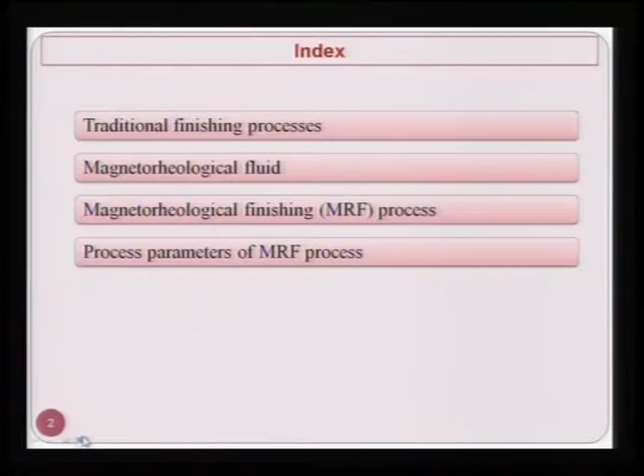The contents of this particular talk are as follows: traditional finishing processes, magnetorheological fluid, magnetorheological finishing process, process parameters of MRF process, and applications of MRF process.

Traditional finishing processes, we have already seen at some other places in some other course. There are three well known traditional or conventional finishing processes: grinding, honing and lapping.

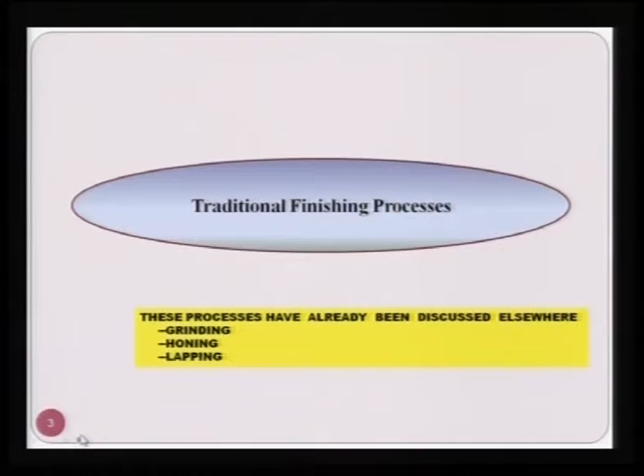All three processes have their constraints. Especially grinding has the limitation that it can only be applied for flat surfaces or cylindrical surfaces. Another problem with grinding is that a large amount of heat is generated, causing thermal stresses in the ground component. Thermal cracks are created, and this process cannot be used for complex shaped geometry.

Honing gives a good surface finish and not a very large amount of heat is generated, but it is limited to cylindrical, external and internal surfaces. Some other shapes can be machined, but not a very large variety of shapes.

Same is true as long as limitations are concerned with lapping. Lapping is a very good, commonly used process, especially good for flat surfaces. It can give good surface roughness value, very low, but cannot be applied for complex shaped components. Also, to some extent in honing and lapping, some very fine thermal errors or thermal cracks may be developed, which we will not be discussing here.

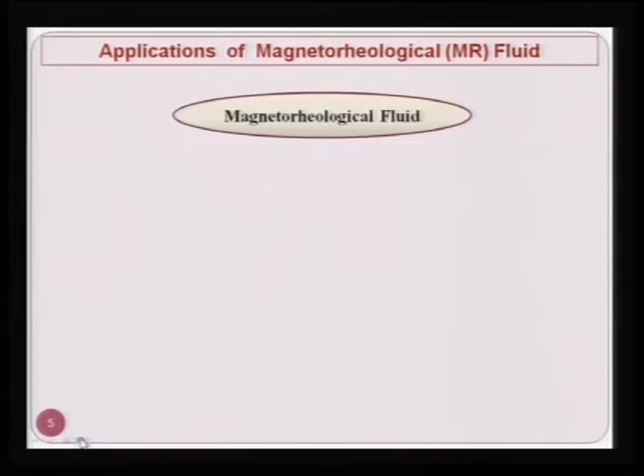Applications of magnetorheological fluid: magnetorheological fluid without having the abrasive particles is also used for many other applications rather than only magnetorheological polishing. When we are using this fluid for polishing purposes, we add abrasive particles which act as the finishing tool, as we will see here.

The magnetorheological fluid has applications in clutches, brakes, dampers, etc. The important point to note here is that the fluid does not contain any abrasive particles in these cases. On the other hand, this magnetorheological fluid is used for finishing of optical lenses, glass, ceramics, plastics and some non-magnetic metals.

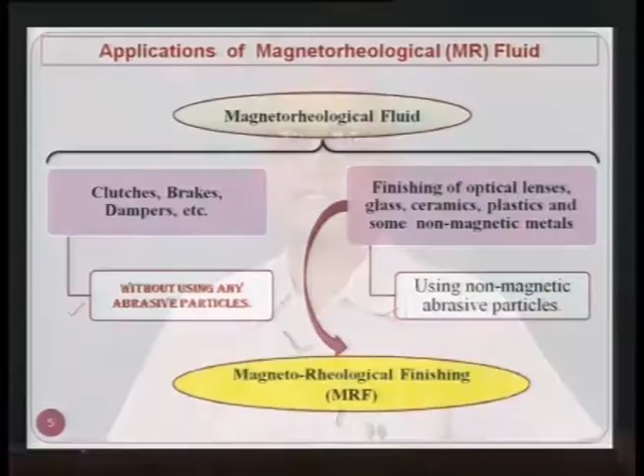The important point here to note is that this fluid is using non-magnetic abrasive particles. These particles include alumina Al2O3, silicon carbide SiC, and it can be diamond particles also.

In this particular talk we are going to discuss the application of magnetorheological fluid in the field of finishing. This process, when using magnetorheological fluid along with abrasive particles, we call magnetorheological polishing fluid or MR polishing fluid. In this talk I am going to discuss only the magnetorheological finishing process, which uses MR polishing fluid as the tool.

The constituents of MR fluid are as follows: magnetic particles, abrasive particles, carrier fluid and stabilizers.

As you can see in this particular table, the magnetic particles may be carbonyl iron powder, also known as carbonyl iron particles, electrolytic iron powder, and iron cobalt alloy, as shown in the first column. Then there are various kinds of abrasive particles added to this fluid: cerium oxide, diamond powder, aluminum oxide, silicon carbide, boron carbide, etc.

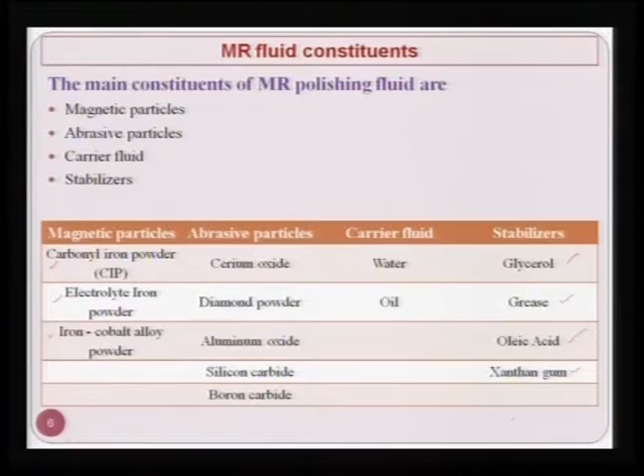Now, when you mix magnetic particles and abrasive particles in the carrier fluid, these particles will settle down at the bottom because they have higher density compared to the carrier fluid. So we need what is known as a stabilizer, and there are various kinds of stabilizers used in magnetorheological polishing fluid. It may be glycerol, grease, oleic acid or xanthan gum, one of these used depending upon the requirement.

Essential features of MR fluid for magnetorheological finishing process: optimum concentration of magnetic particles and abrasive particles is very important. If the percentage of these two constituents is very high, the efficiency of the finishing process is going to go down.

High yield stress under magnetic field: here we are applying the magnetic field and the fluid is always subjected to it. So whatever are the properties of MR polishing fluid without the application of magnetic field and with the application of magnetic field are going to be very different from each other.

Low off state viscosity means the viscosity of the fluid without the application of the magnetic field. Less agglomeration and good redispersibility should be there. The particles should not get agglomerated, otherwise they are going to affect the performance and quality of finishing. And once the magnetic field is no more, the particles should get dispersed quickly.

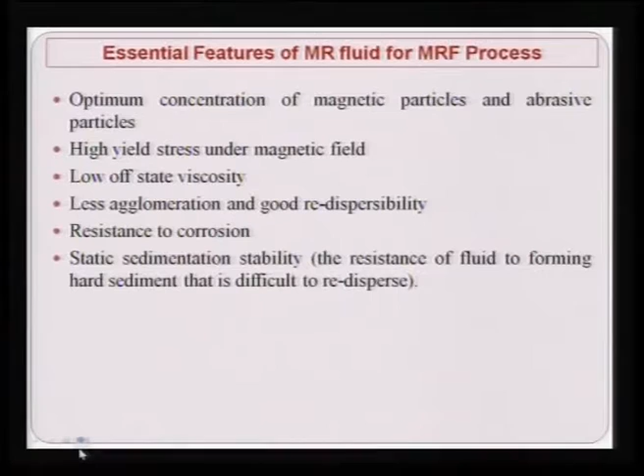And resistance to corrosion, static sedimentation stability, that is the resistance of fluid to forming hard sediment that is difficult to redisperse. That is what I mentioned earlier in case of point 4, that they should be static sediment stable. That means sedimentation should not take place, otherwise the properties of the fluid are going to change and that will not give the proper finishing.

High polishing efficiency, that is high removal rate without surface damage. Apart from this high material removal rate, we as manufacturing engineers are always concerned with the high finishing rate, because in finishing processes, finishing rate is more important than material removal rate. The objective is to achieve the desired surface finish without any defect in the lowest possible time, not to remove a large amount of material, rather to achieve the desired surface finish in the minimum possible finishing time.

Magnetic particles. The main functions of magnetic particles in the fluid are to form dense chain structure under magnetic field and to hold abrasive particles during the finishing process. This is very important. Once the abrasive particles are held by the magnetic particle chains, this acts something like a very soft grinding wheel, in which the bonding material holds the abrasive particles, and finishing is done. But once the fluid is out of the magnetic field zone, it will shatter.

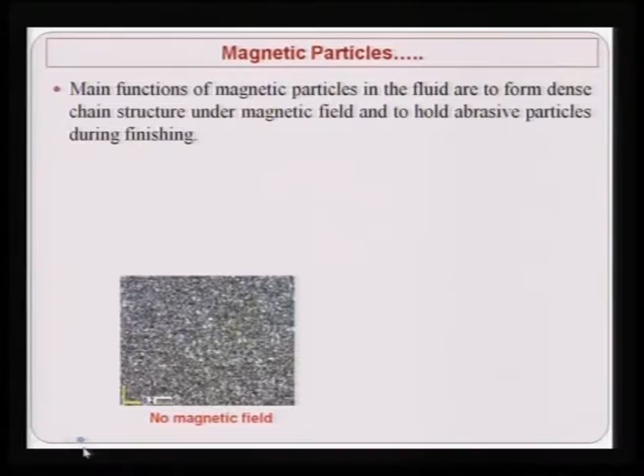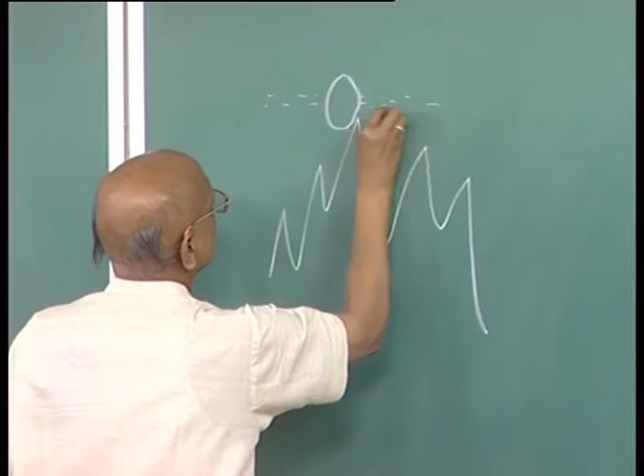I will just show you here something like this - this is the abrasive particle which is being held by the fluid chain. There is the chain of iron particles, and this chain is being pushed in this particular direction due to the rotation of the wheel. Then this peak will get removed like this, and the Ra value, RMS value will keep decreasing.

Without magnetic field, magnetic particles are dispersed randomly in the MR fluid as shown in figure 1a, and under the influence of magnetic field, magnetic particles are aligned along the magnetic flux lines - here is the north pole, here is the south pole. This is the direction in which the chains are being formed, as you can clearly see, and in between the chains, some abrasive particles are being held within the chains.

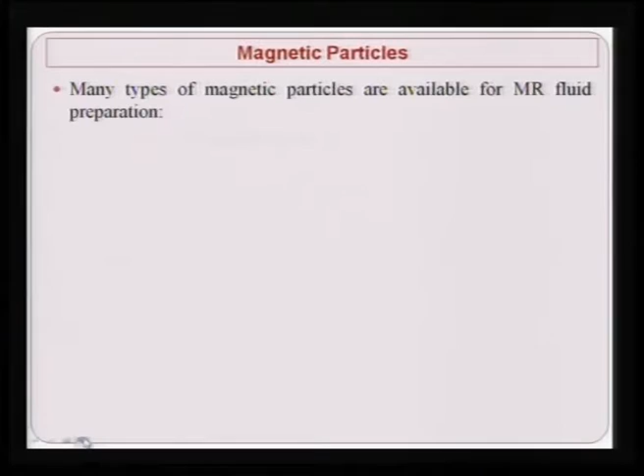Many types of magnetic particles are available for MR fluid preparation. As I mentioned earlier, you can use carbonyl iron particles, although carbonyl iron particles are very expensive, electrolyte iron powder, iron cobalt alloy powder, etc.

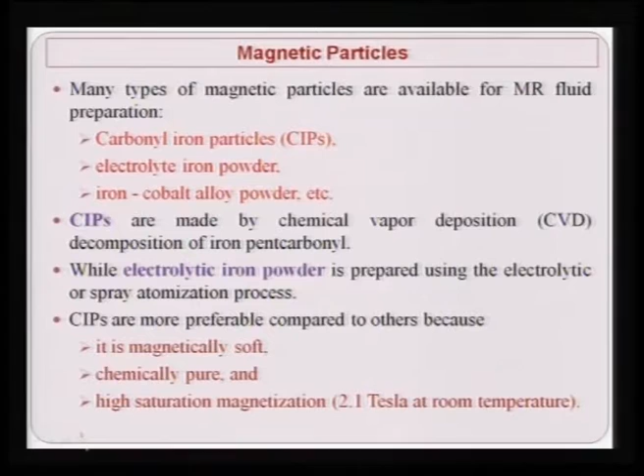CIPs are made by chemical vapor deposition, decomposition of iron penta-carbonyl, while electrolytic iron powder is prepared using the electrolytic or spray atomization process. CIPs are more preferable compared to others because they are magnetically soft, chemically pure, and have high saturation magnetization, that is 2.1 Tesla at room temperature, which is really a very high value of saturation compared to the saturation value for any other iron or magnetic particle.

Abrasive particles are non-magnetic materials in MR fluid responsible for material removal. As I mentioned earlier, these are the abrasive particles which really remove material from the workpiece, while chains of iron or carbonyl iron particles just act as the bonding material in the grinding wheel, holding these abrasive particles. When there is relative motion between the abrasive particle and the workpiece surface, material is removed in the form of microchips or nanochips depending upon the finishing conditions.

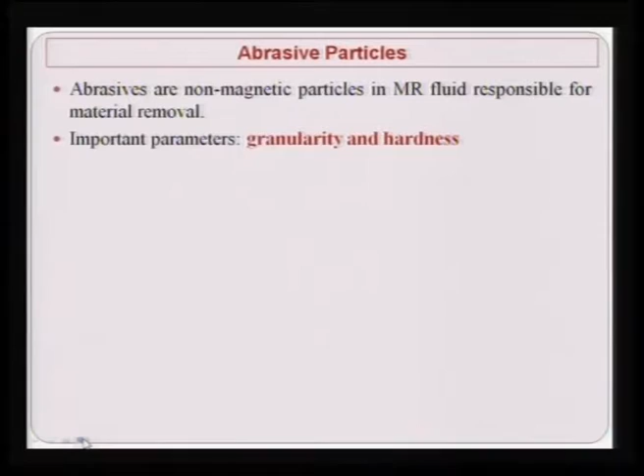Important parameters are granularity and hardness of these abrasive particles, which make the difference as far as finishing rate is concerned. Commonly used abrasive particles are alumina Al2O3, silicon carbide SiC, cerium oxide CeO2, and diamond powder. Other abrasive particles can also be used depending upon their availability, cost, and the requirement of the process.

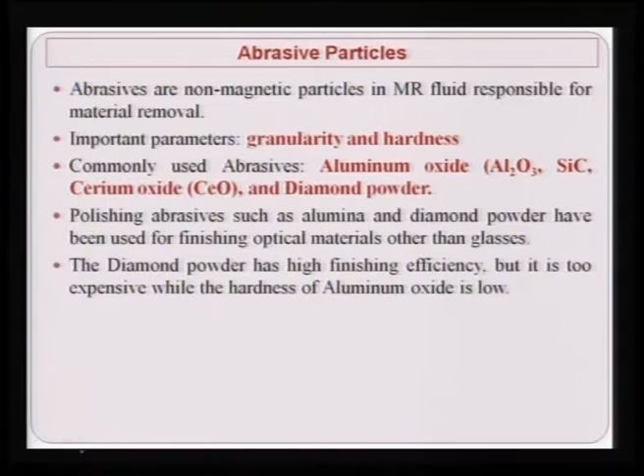Polishing abrasives such as alumina and diamond powder have been used for finishing optical materials other than glasses. Diamond powder has high finishing efficiency but it is too expensive, while the hardness of aluminum oxide is low. So diamond particles can be used, but they are quite expensive. So one has to consider the application, then only diamond should be used as the abrasive particle for finishing purposes.

However, the most commonly used polishing abrasive and carrier liquid combination for magnetic field assisted finishing of all optical glasses, including many crystals, is cerium oxide and water respectively.

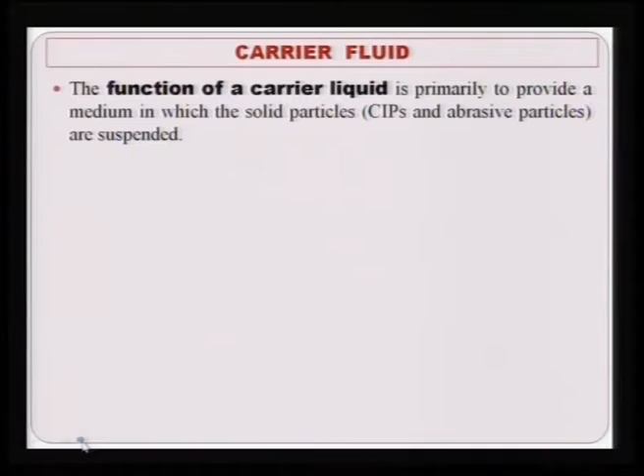The function of the carrier fluid liquid is primarily to provide a medium in which the solid particles like carbonyl iron particles and abrasive particles are suspended. The off-state viscosity of MR fluid should be as low as possible, so that it can easily reach difficult to reach areas, because wherever this fluid reaches and wherever there is relative motion between the abrasive particle and the workpiece surface, finishing will take place only in those areas. If the fluid is not able to reach those difficult to reach areas, then no finishing is going to take place, and you will not get the appropriate finished area as you want.

Important properties of carrier fluid are: the carrier liquid should be non-corrosive with magnetic particles, that is the carbonyl iron particles or iron particles, abrasive particles like alumina, silicon carbide, diamond, etc., as well as the components used in the device, that is the machine or MRF machine components material.

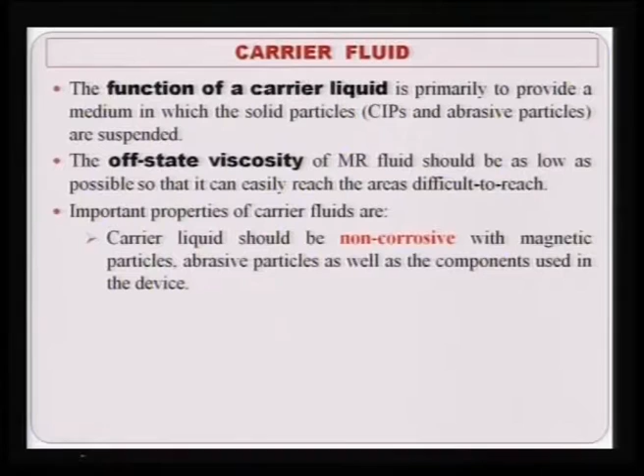Carrier liquid should have high boiling temperature and low freezing point, because heat is generated to some extent, and the carrier fluid should not start boiling, otherwise it will not be able to serve its purpose properly. It should have a low freezing point, because in many locations the environmental temperature is low, and it should not freeze, otherwise it will not serve the function for which the fluid is to be used.

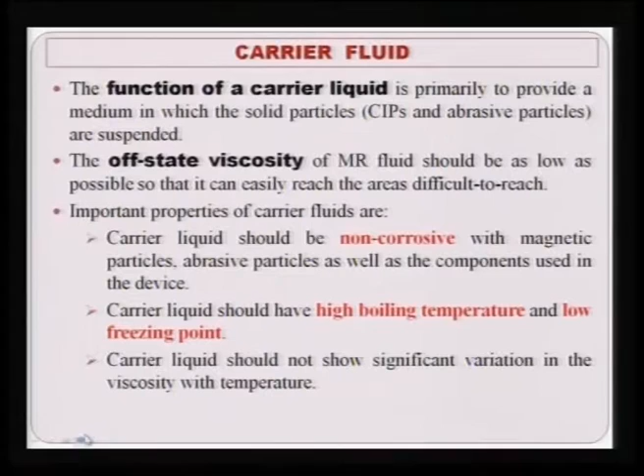Carrier liquid should not show significant variation in viscosity with temperature. As the temperature changes, the viscosity of the carrier fluid should not change substantially, otherwise it will not remain in the designed parameter condition. If it does not remain in the designed parameter condition, then you are not going to get the desired finishing rate and final surface roughness value.

Oil or water is generally used as a carrier fluid. Oil based carrier liquid has high viscosity, so MR fluid has good performance in stability and sedimentation. That simply means that solid particles will not be able to sediment or settle down so easily, because oil has higher viscosity compared to water.

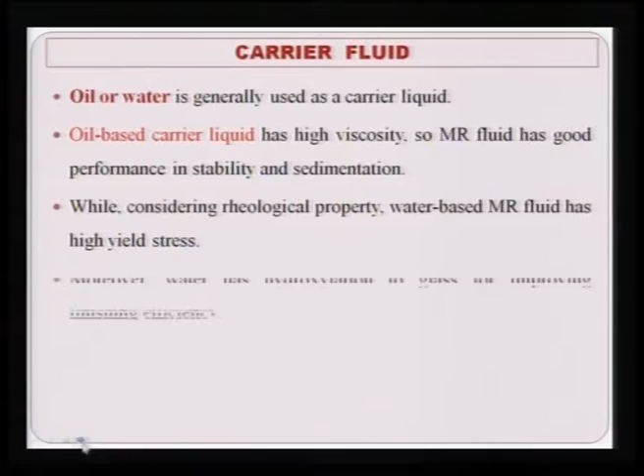While considering rheological property, water based MR fluid has high yield stress compared to oil based liquid. Moreover, water has hydroxylation to glass for improving finishing efficiency. In addition, water imparts cooling during finishing. The cooling rate in case of water is higher compared to the cooling rate in case of oil.

Water has been proven as the most recommended carrier liquid for finishing silicon or silicon based materials. Water is invariably used for silicon or silicon based materials for finishing purposes, because it chemically reacts and is able to easily finish ceramics or ceramics based materials with comparatively soft abrasive particles.

Stabilizers: the stabilizer is used to disperse the magnetic particles and abrasive particles uniformly in suspension and to retard oxidation of the magnetic particles and prevent agglomeration, as I have emphasized earlier, so that they do not permit the solid constituents of the MR polishing fluid, that is CIP or carbonyl iron particles and abrasive particles, to agglomerate.

Commonly used stabilizers are glycerol or grease. Stabilizers create a coating on the particles so that MR fluid can easily redisperse. This means the stabilizer tries to minimize the agglomeration of these solid particles or powder, so that they can be easily dispersed in the fluid.

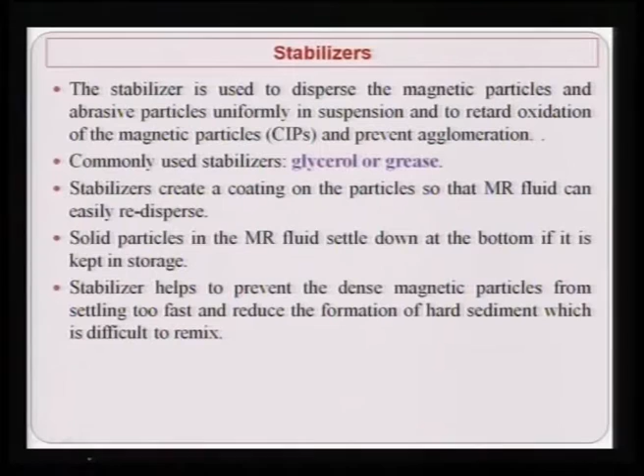Solid particles in the MR fluid settle down at the bottom if kept in storage. The stabilizer has to prevent the dense magnetic particles from settling too fast and reduce the formation of hard sediment, which is difficult to remix, because we do not want a hard sediment of the magnetic or non-magnetic particles to form. Otherwise, mixing of these particles becomes very difficult, and one should be very careful before using this MR polishing fluid.

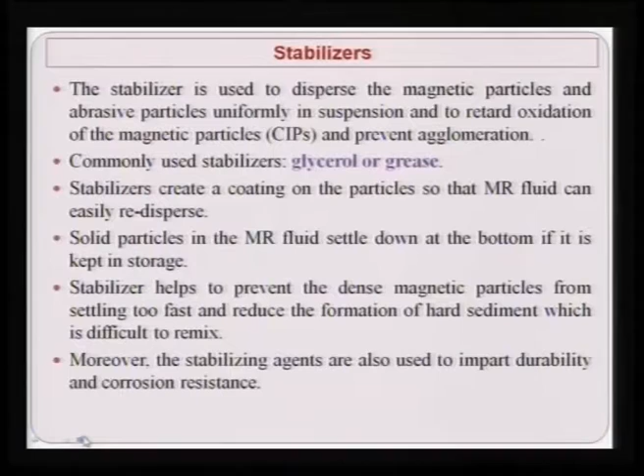It should be properly mixed for a good amount of time, otherwise the performance of the MR polishing will not be as desired. Moreover, stabilizing agents are also used to impart durability and corrosion resistance.

Now, let us see some details of MR finishing or magnetorheological finishing process. Here I will show you an experimental setup which has been designed and fabricated at IIT Kanpur Manufacturing Science Lab.

Magnetorheological finishing: this process was developed in the beginning by the Center for Optics Manufacturing, Rochester, USA, for finishing high precision lenses, ceramics, etc.

MR fluid consists, as I have already mentioned, magnetic particles, abrasive particles, water or oil as the carrier fluid, and additives, specifically the stabilizers.

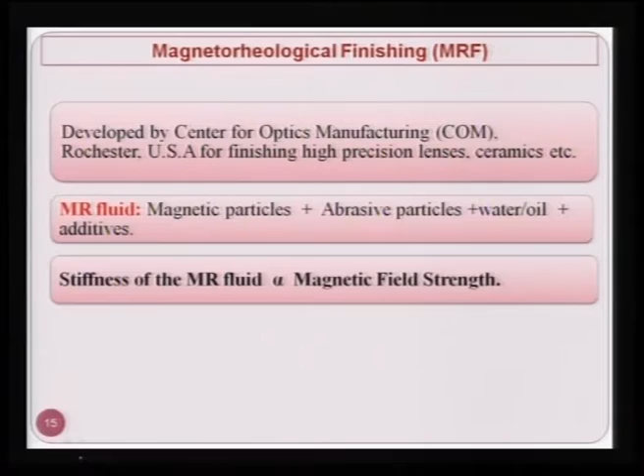Stiffness of the MR fluid is a function of the magnetic field strength. Higher the field strength, stronger is the chain being formed by the magnetic particles, and the abrasive particles will be held more strongly compared to the case when the magnetic field strength is lower.

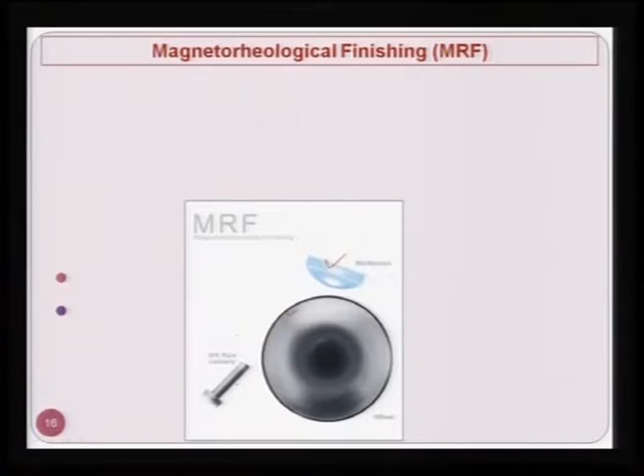Now you can see here the function of the magnetorheological finishing process. This is the lens which is to be finished, and here you can see this pink color and other particles. The pink color particles are the abrasive particles and the other particles are the magnetic particles, and you can see only the abrasive particles getting in contact with the lens, finishing it.

You can easily rotate the lens as well as move it in these two different directions, so that the whole surface of the lens is finished by this particular process.

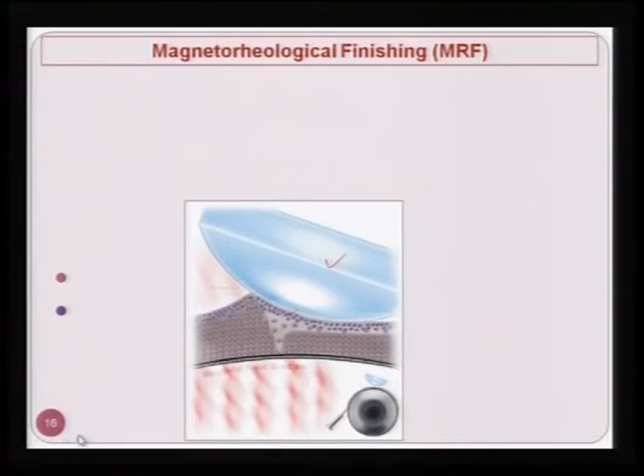Fluid is extruded onto a rotating wheel in a thin ribbon that will contact the optical lens. You can clearly see here, this is the fluid, and a thin layer is there between the lens and the wheel, being extruded in this particular direction.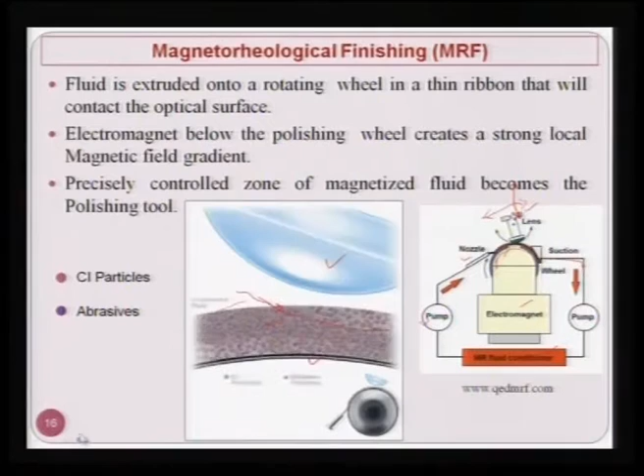Now, lapping and chemomechanical polishing are processes which are very good and extensively used in computer industries, especially for computer components, giving very good surface finish, but the rejection rate is quite large in case of CMP, as you can see here from the kind of force acting on the workpiece surface.

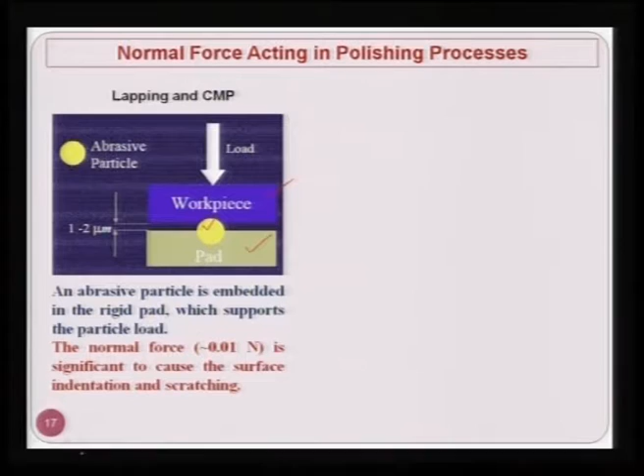The normal force, somewhere around 0.01 Newton, is significant enough to cause surface indentation and scratching, meaning it damages the surface of the workpiece. Although the normal force looks quite low, the size of the abrasive particle is also very low—it is micron sized—so the stresses acting on the workpiece surface are quite large, and this leads to damage of the workpiece surface.

That is why I mentioned that the rejection rate in case of CMP is quite high. But if you see the MR polishing phenomena, here the workpiece is in contact with the abrasive particles, but the abrasive particle is not in contact with any solid support; rather it is part of the MR fluid, and the force applied on the abrasive particle is through hydrostatic pressure and magnetic buoyant force.

These are the two major constituents contributing to the normal force on the abrasive particle which is transferred to the workpiece. The amount of force compared to CMP is much lower, as particle-surface contact area is very small. The hydrostatic pressure results in insignificant normal force, about 10 raised to power minus 7 Newton, while in CMP it is 10 raised to power minus 2 Newton. So there is a significant difference in the magnitude of force acting on the workpiece surface through the abrasive particles.

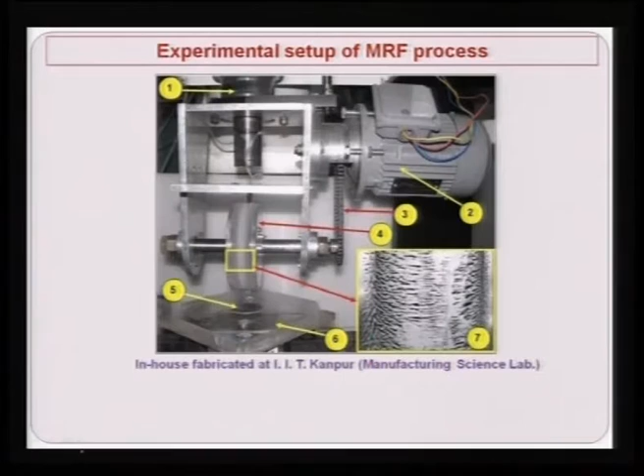Now this is the experimental setup, fabricated at IIT Kanpur. Here one is the milling machine head. We have utilized a CNC milling machine for developing this MR finishing process setup, so this is the CNC machine head. 2 is the AC motor, 3 is the chain drive you can see here, and 4 is the permanent magnet assembly. That permanent magnet assembly you cannot see from outside, it is inside, and instead of using an electromagnet, here we have used permanent magnets.

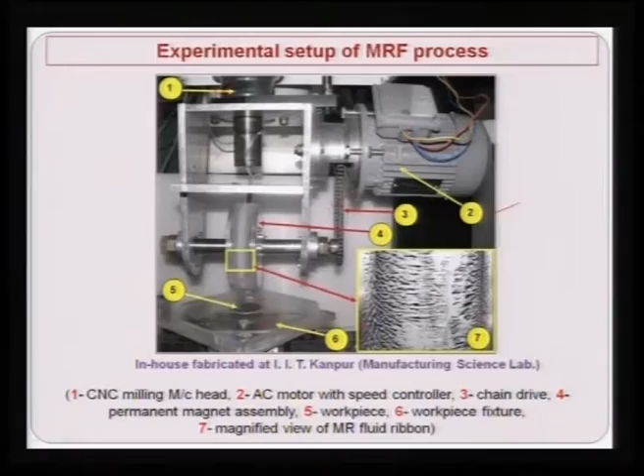5 is the workpiece shown over here, and 6 is the workpiece fixture, and 7 is the magnified view of MR fluid ribbon being formed. As you can see here, these are the brushes being formed, and their strength depends upon the magnetic field strength. These brushes have abrasive particles outside, as we have seen in the video film. When these abrasive particles come in contact with the workpiece surface, they remove the peaks one by one, and the finishing keeps on improving, so you can get surface finish less than 10 nanometers in this particular case easily.

How the forces are acting, as you can see over here: fluid flow direction is shown in this particular direction, and magnetic field direction is in this particular direction. As I mentioned earlier, two types of forces are acting on the abrasive particle, shown here in yellow color. One is the normal force and another is the tangential or axial force.

This is the peak of the workpiece surface. The normal force is responsible for the penetration of the abrasive particle into the workpiece surface, and the tangential force is responsible for removing material from the workpiece surface in the form of a microchip. The size of this microchip to be removed will depend on the normal force acting, and if the tangential force is sufficient to remove that indented material, then it gives you the chip.

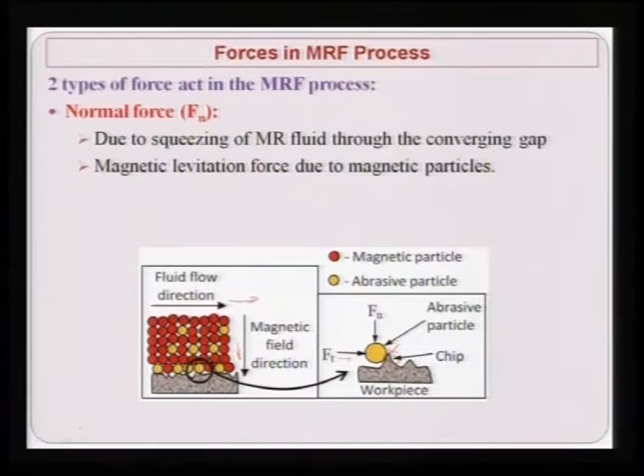Two types of forces act in the MRF process, as I have just explained. One is the normal force Fn, due to the squeezing of the MR fluid through the converging gap, and second is the magnetic levitation force due to magnetic particles, and another is the tangential force, which is due to the rotation of the carrier wheel.

Process parameters of MRF process.

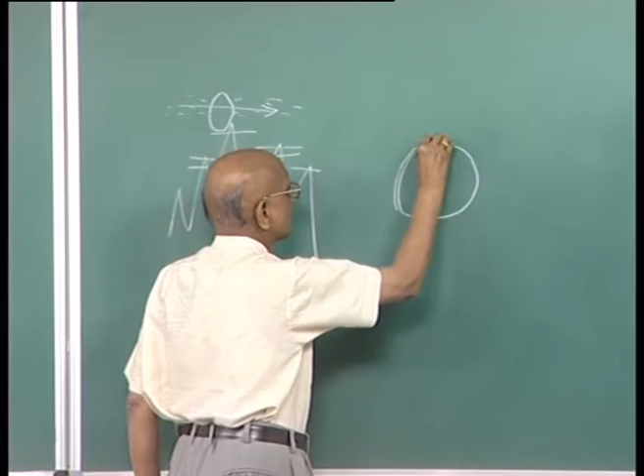Before I proceed, let me explain what the squeezing force is. In the MRF process, you have seen there is a wheel which consists of a ribbon, and this ribbon is nothing but the MR polishing fluid consisting of abrasive particles and iron particles. If you see the enlarged view, as in the video film, these are the abrasive particles, while elsewhere you have the magnetic particles, and these abrasive particles come in contact with the workpiece surface.

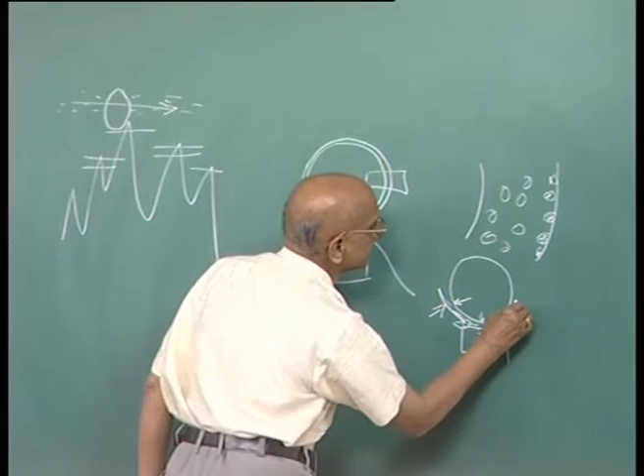If you see the enlarged view, this is the wheel, this is the workpiece surface. The gap thickness here is greater than the thickness over there, so this squeezing takes place, where the fluid is squeezed through and then moves along. When this squeezing takes place, it creates additional normal force on the abrasive particles.

Process parameters of magnetorheological finishing process.

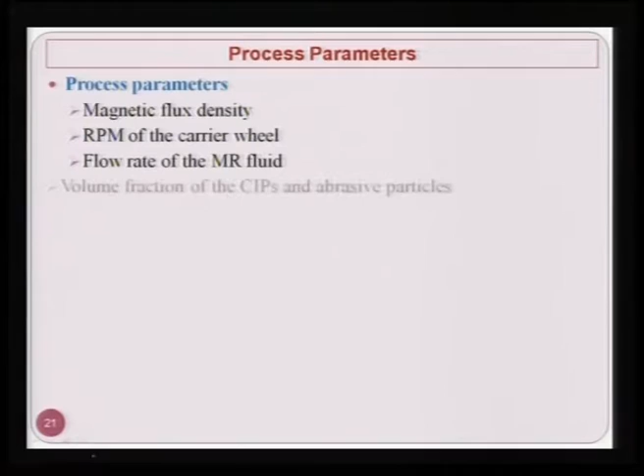Magnetic flux density is one of the very important process parameters. RPM, revolutions per minute of the carrier wheel, or indirectly the surface speed of the carrier wheel, which makes the difference. Flow rate of the MR fluid, volume fraction of the carbonyl iron particles and abrasive particles, size of the carbonyl iron particles and abrasive particles, feed rate of the workpiece that decides the relative velocity between the abrasive particle and the workpiece, and type of the workpiece material.

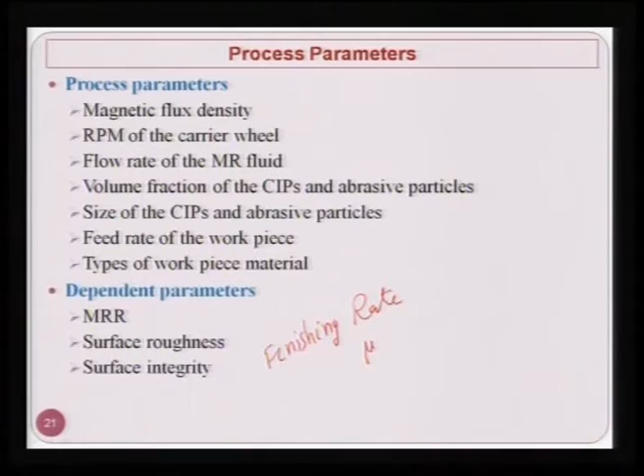Now, there are certain parameters which depend on these finishing parameters, and these are also known as responses, which decide the performance of the finishing process: material removal rate, surface roughness, surface integrity, and one thing I'd like to mention, quite important, is the finishing rate. This finishing rate has units of removal of peak in terms of micrometer or nanometer per unit time, so it can be micrometer per second or nanometer per second.

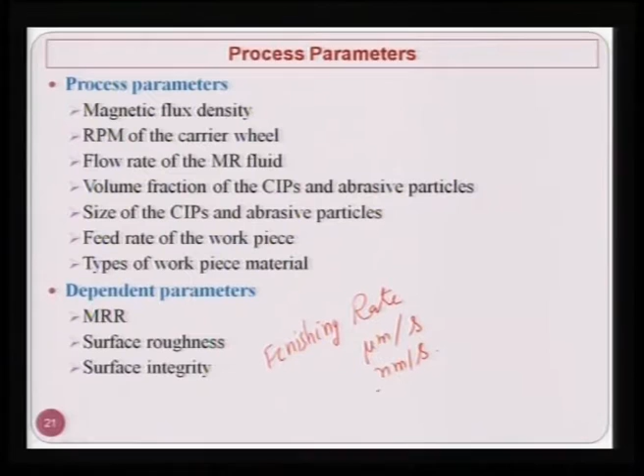Effects of magnetic particles: as I have already explained in these sketches, the main functions of magnetic particles are to form a dense chain structure under magnetic field and to hold abrasive particles during finishing. So you can see with the application of the magnetic field, it is able to form the chain structure, and it is holding the abrasive particles within or between the chains.

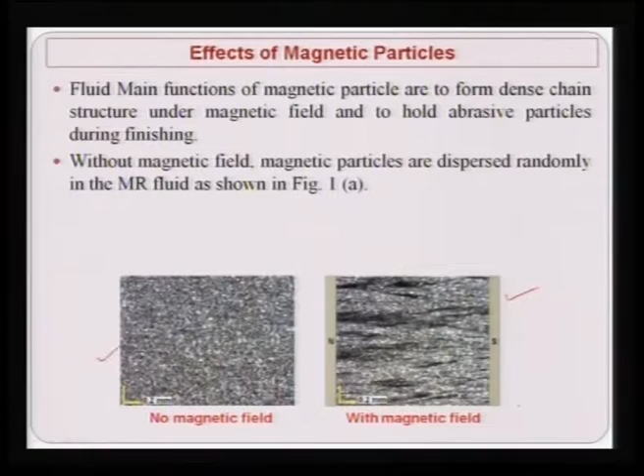Without magnetic field, magnetic particles are dispersed randomly in the MR fluid as shown in figure 1a, and under the influence of magnetic field, magnetic particles are aligned along the magnetic flux lines, as you can see in the right hand side figure, from north pole to south pole, as shown in figure 1. You can really simulate these chains, as I mentioned earlier in this lecture, with the soft bonding material of a grinding wheel.

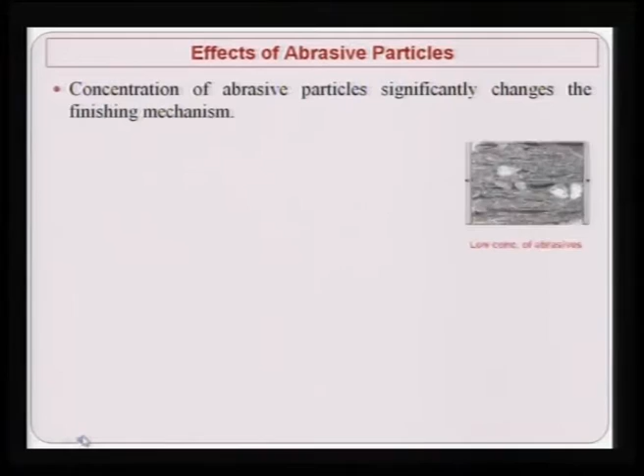Now, what is the effect of abrasive particles? Concentration of abrasive particles significantly changes the finishing mechanism. At low concentration of abrasive particles, you can see particles are dispersed at different locations. Some locations are without abrasive particles, some are with abrasive particles, and material will be removed by these abrasive particles only, not by the carbonyl iron particles. A few abrasives are trapped in the CIP chain structure, and less discontinuous chains of CIPs are formed. Hence, CIP chains are capable of gripping abrasive particles firmly during the finishing process.

Now, when you have high concentration of abrasive particles, you can see many abrasive particles get agglomerated at one particular location, and this, if too high, may not be desirable, because it may lead to deep scratches and non-uniform finishing along the surface of the workpiece. At higher abrasive particle concentration, more amount of abrasives are entangled between CIP chains, and they reduce the strength of the fluid under shear flow.

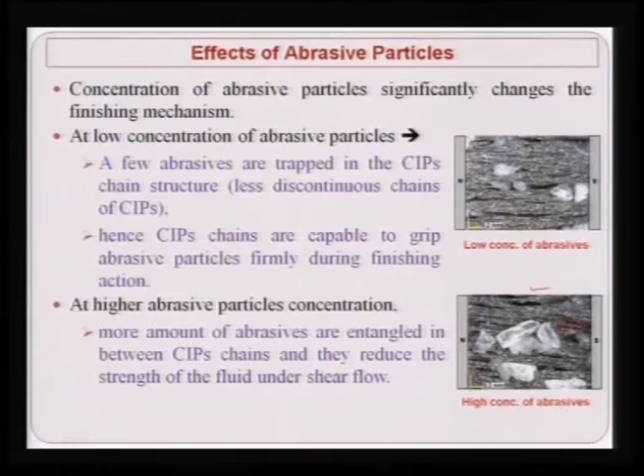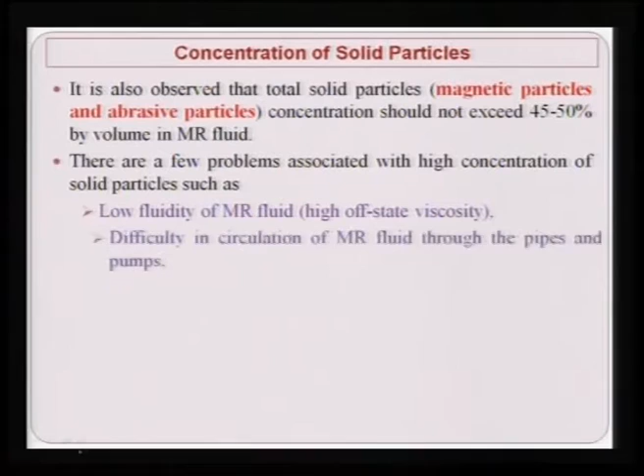Concentration of solid particles: it is also observed that total solid particles, magnetic particles and abrasive particles, concentration should not exceed 45 to 50% by volume in MR fluid. There are a few problems associated with high concentration of solid particles, such as low fluidity of MR fluid, high off-state viscosity, which means it will not be able to reach difficult areas, and you may not get proper finishing, especially in complex shaped components. There's also difficulty in circulation of MR fluid through pipes and pumps, and difficulty remixing the MR fluid due to low dispersibility.

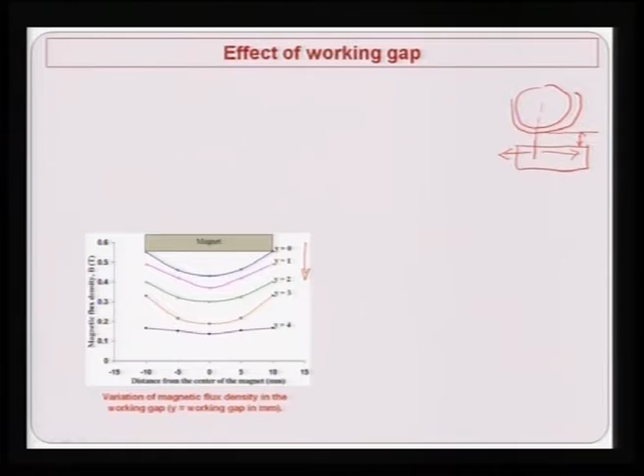Now you can also see as the working gap is increasing, the material removal rate is decreasing, which is obvious, because as the working gap increases, the magnetic flux density decreases, and as the magnetic flux density decreases, the holding power of the fluid on the abrasive particles will also decrease. So the fluid, rather than the abrasive particles, will not be able to penetrate deeper into the workpiece surface, hence the material removal rate will decrease.

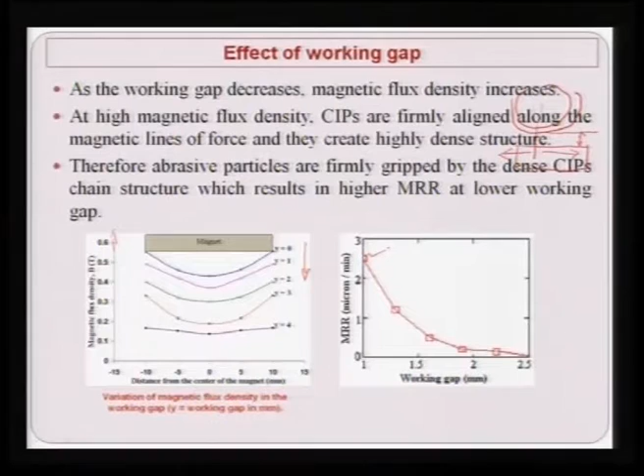As the working gap decreases, magnetic flux density increases. At high magnetic flux density, the CIPs are firmly aligned along the magnetic lines of force, creating a highly dense structure. Therefore, abrasive particles are firmly gripped by the dense CIP chain structure, which results in higher MRR at lower working gap, as shown at the top or left side of the figure on the right.

Effect of the carrier wheel speed. This figure shows the effect of wheel speed on final surface finish and MRR. Final RA decreases and MRR increases with increasing carrier wheel speed. As wheel speed increases, MRR increases, but the final RA value decreases, meaning a better surface finish is achieved.

It is assumed that the MR fluid ribbon moves with the same speed as the carrier wheel, that is, no slip condition exists between the wheel and the fluid ribbon. Therefore, with the increase of wheel speed, the speed of the abrasive particles also increases.

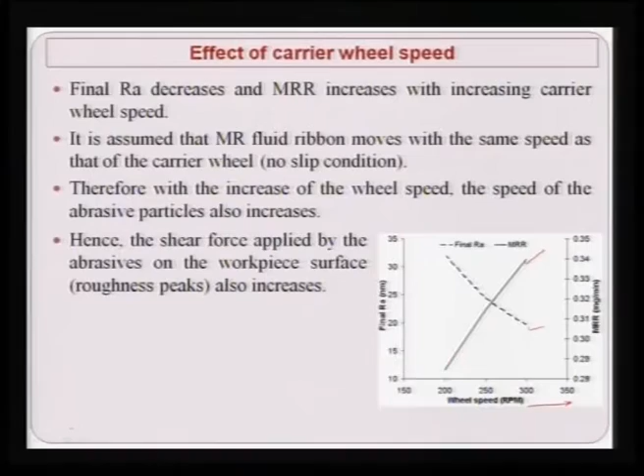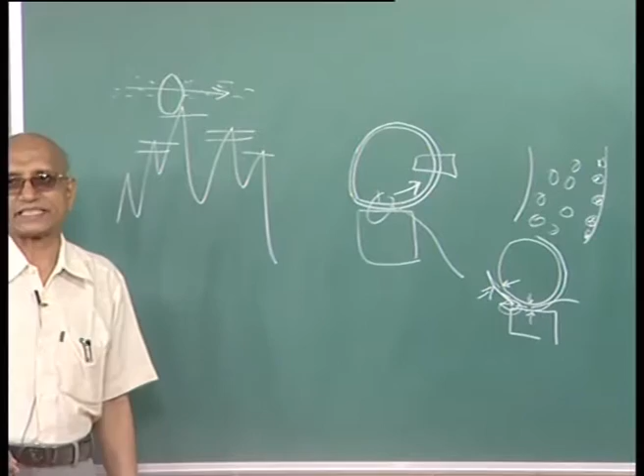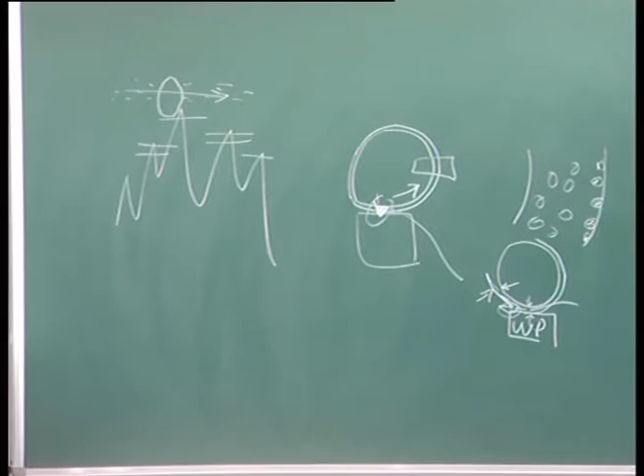Hence, the shear force applied by the abrasives on the workpiece surface also increases. As the RPM of the wheel increases, the surface speed of the wheel's outer periphery increases, and so whatever abrasive particle is there, its speed with respect to the workpiece will also increase. This is very similar to a higher cutting speed in conventional metal cutting, which is why you get a higher material removal rate.

Furthermore, as the carrier wheel speed increases, the frequency of interaction of the abrasive with the workpiece also increases, which accelerates the finishing action. This is very simple to understand.

Abrasive indentation: some abrasives indent the workpiece surface considerably, but after indentation these abrasives are not able to remove material continuously, and eventually they get released from the CIP chain structure and roll over the workpiece surface.

This is very nicely depicted here, because as mentioned earlier, if the normal force is too high, the abrasive particle penetrates deep inside the workpiece surface, and to remove the material, the tangential force must also be large enough to remove the whole amount of material.

But if the force is smaller, the chain structure will break, and the abrasive particle, as seen in the second figure, will rotate such that the depth of penetration decreases, and with lower depth of penetration it will be able to remove material from the workpiece.

As you can see, coming from here to here, the depth of penetration has decreased compared to this particular case t. This becomes the depth of penetration T-dash, and this T-dash is smaller than T.

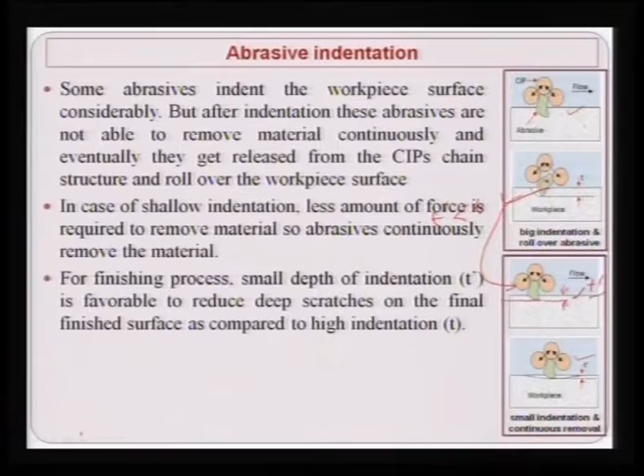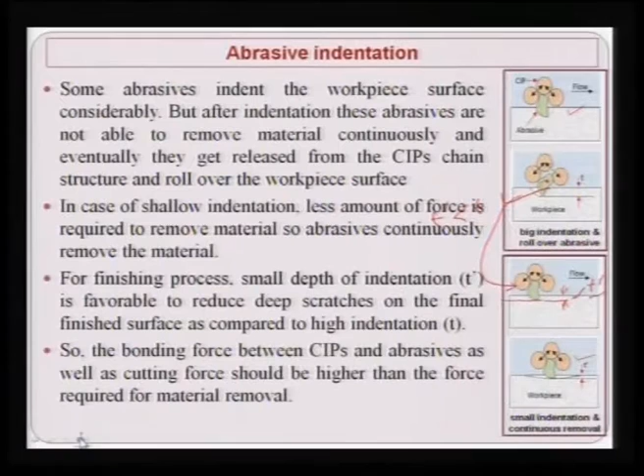For the finishing process, a small depth of indentation is favorable to reduce or avoid deep scratches on the final finished surface, as compared to high depth of indentation shown in figure 1. So it is always desirable to have a smaller depth of indentation, meaning a smaller force compared to a larger normal force. The bonding force between CIPs and abrasives, as well as cutting force, should be higher than the force required for material removal.

Effect of MR fluid composition: water and cerium oxide is the most preferable combination for finishing silicon material.

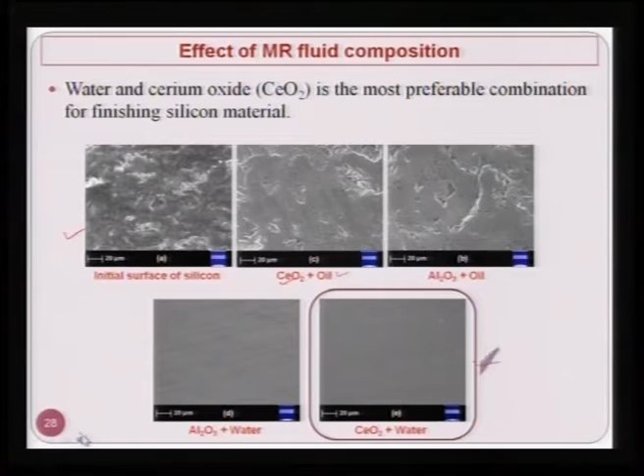Now let us see some of the applications of the magnetorheological finishing process.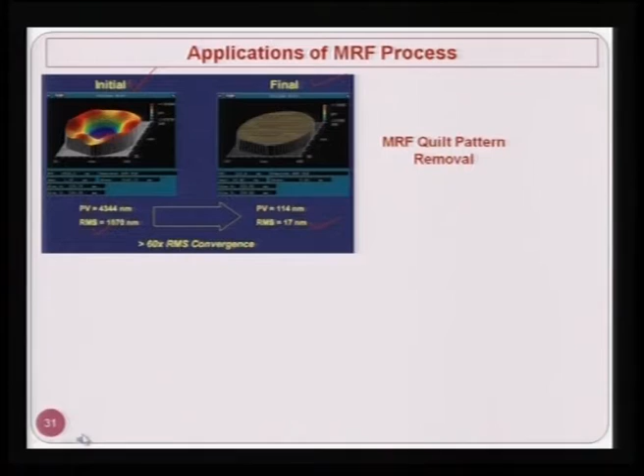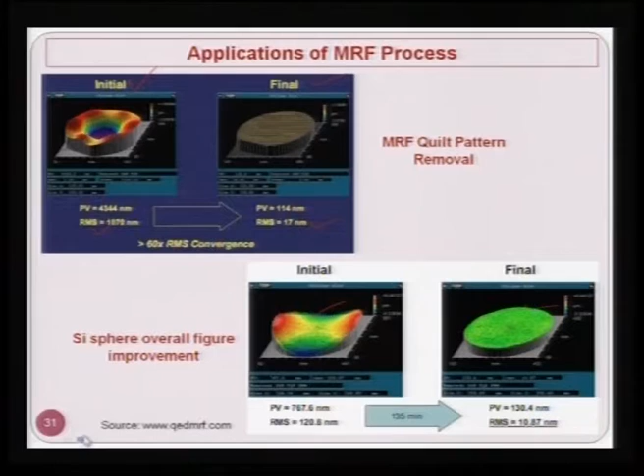And this has been taken from this particular source.

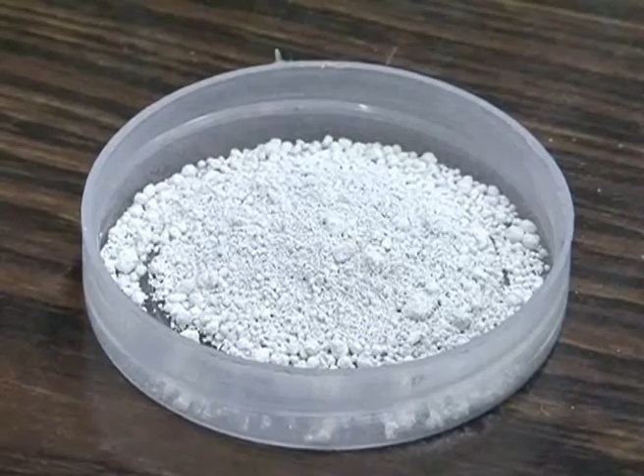The basic component of MRF process is magnetorheological fluid, and presently I am giving you a preparation of magnetorheological fluid, how it is prepared here. Abrasive particles are required to increase material removal, in other words, to reduce finishing time. In the present case, the abrasive is aluminum oxide.

Carbonyl iron particles, in other words magnetic particles, are required to make the MR fluid stiffen under the effect of magnetic field. When the magnetic field is applied, iron particles are aligned along the line of magnetic field and they create a dense structure. Water is required to provide a liquid medium so that magnetic particles as well as abrasive particles disperse uniformly. Some additives are also required in the MR fluid so that magnetic particles as well as abrasive particles remain suspended and to reduce the sedimentation problem. In the present case, it is glycerol.

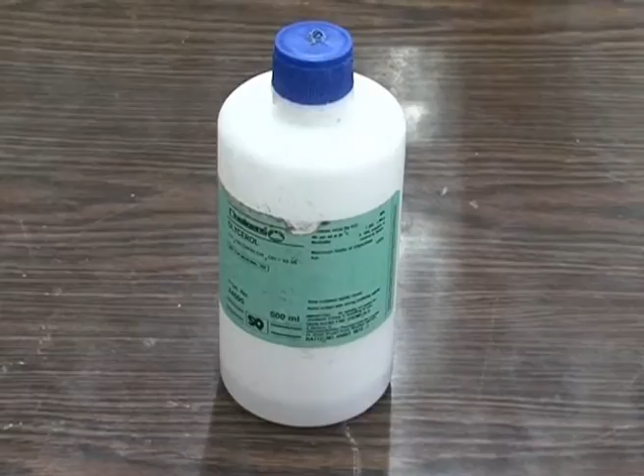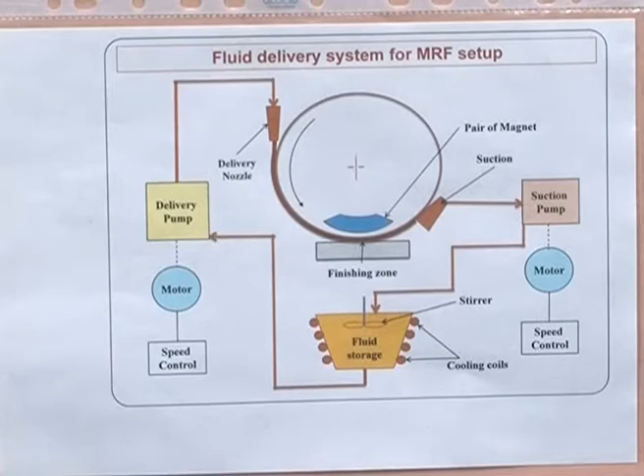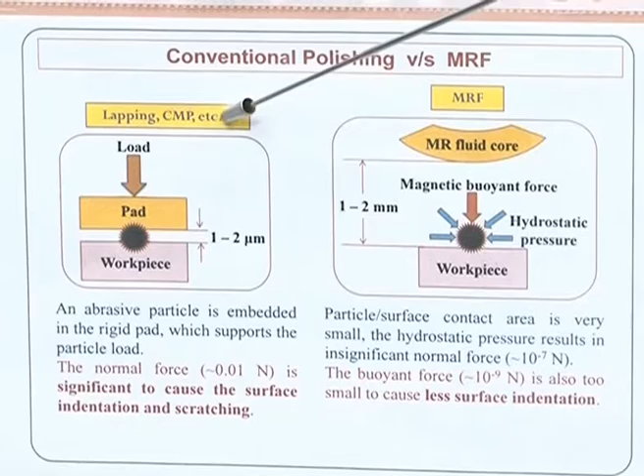This diagram shows the forces acting in conventional polishing versus MRF. In conventional polishing such as lapping or chemomechanical polishing, shortly called CMP process, abrasive particle is embedded in the rigid pad which supports the particle load. Therefore, the normal load around 0.01 Newton is significant to cause surface indentation or scratching in case of nano finishing.

While in the MRF process, the particle surface contact area is very small so that the hydrostatic pressure results in insignificant normal force around 10 raised to minus 7 Newton. Furthermore, the buoyant force is also around 10 raised to minus 9 Newton, which is too small to cause surface indentation in case of MRF process. So from this comparative view, you can see that the MRF process is far better than conventional polishing for nano finishing of different components.

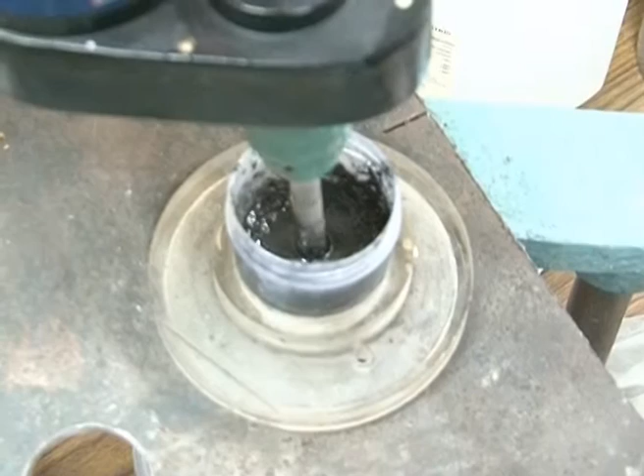All the constituents such as magnetic particle, abrasive particle, water and glycerol are mixed together in proper concentration. After adding all these constituents, it is stirred for at least 1 hour to get it mixed homogeneously. Now you can see all the constituents of MR fluid are homogeneously mixed, and this fluid is ready to use in the MRF process.

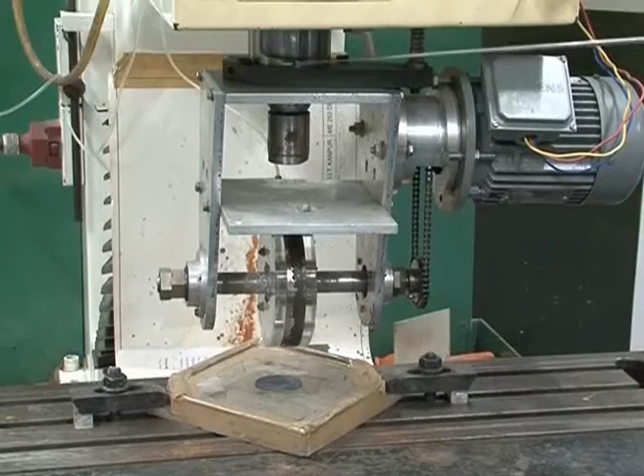The whole setup is connected to the Z axis of the CNC milling machine so that the working gap can be adjusted by computer control. You can control X, Y and Z movement simultaneously by giving the motion.

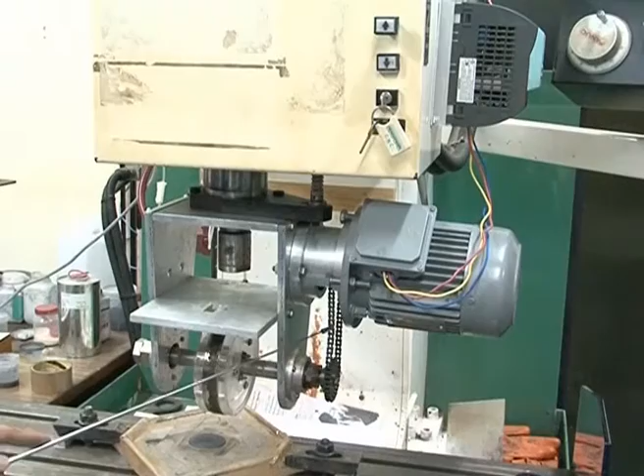This is a permanent magnet which is covered by 2 perspex sheets, and this whole assembly is called the carrier wheel. The carrier wheel is connected to the AC motor through this timing chain, and this AC motor is connected to the variable frequency drive, so that the wheel speed can be controlled automatically by this variable frequency drive.

You can give a particular value of wheel speed so that it rotates at that value only. Most of the components should be non-magnetic, so that the magnetic field lines should not be distracted by these components. This is a workpiece and this is the workpiece fixture. In the present case, this workpiece is single crystal silicon, which is to be finished up to nanometer level by this magnetorheological finishing process.

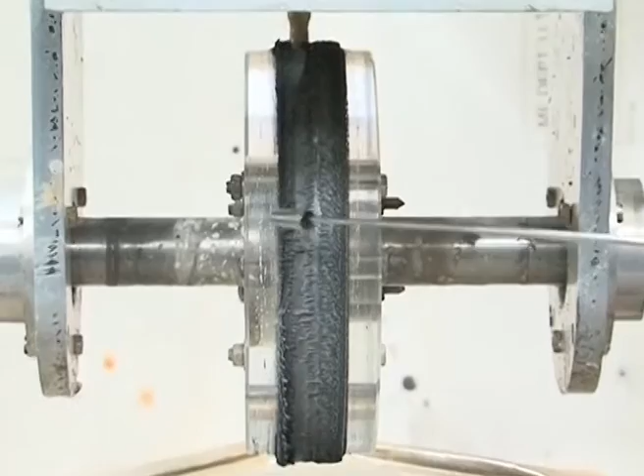Now MR fluid is applied on the carrier wheel. You can see the MR particles or magnetic particles are aligned from the north pole to south pole on the magnet. You can clearly see the chain structure of the MR fluid particles.

After that, a particular gap is set between the workpiece and the carrier wheel by changing Z-axis position. Once the gap is fixed, rotation is given to the carrier wheel. X and Y movement can also be given to the carrier wheel so that the whole workpiece surface can be covered.

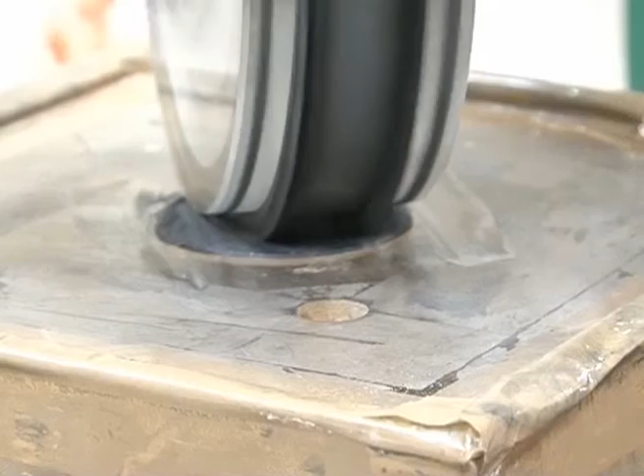Here you can see the stiffened MR fluid interacting with the workpiece surface. At the finishing zone, two types of forces are exerted on the workpiece surface: one is tangential force applied by the rotation of the carrier wheel, and another is the normal force. This is due to flow of stiffened MR fluid through the converging gap, because the gap is slightly smaller than the thickness of the ribbon applied on the wheel, and the hydrodynamic action of the MR fluid also creates some normal force. This process continues till the desired surface finish is achieved.

Now I will show you the finished as well as unfinished silicon workpiece surface. You can easily see the difference between unfinished and finished silicon surface. This is the unfinished surface - you can see there is no reflection visible on the surface. Now this is the finished silicon surface, and you can easily see the reflection of IITK and CSIR on the finished surface.

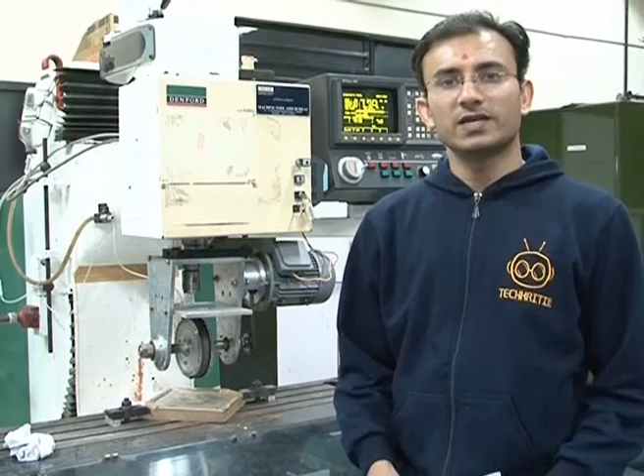The present result shows that the MRF process is a very efficient process for finishing optical as well as hard material. Thank you for your attention.